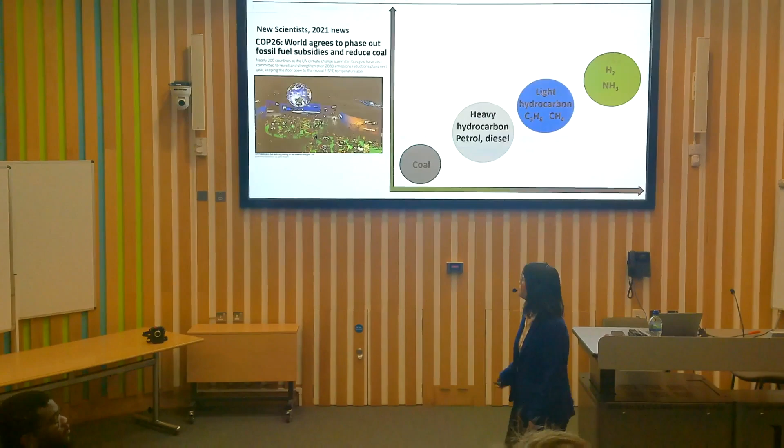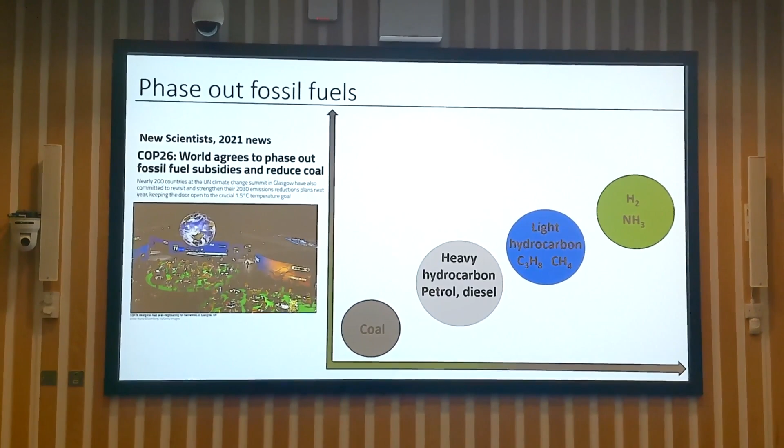I want to show this because this is my personal drawing showing how human society over the past probably 100 years, the past century, how the power source, the fuel, has evolved. So we started with coal, the dirty steam engine, and also the coal-fired power plant, powering transport and also electricity supply.

And it created a lot of problems. There's a huge amount of CO2 emission. I think the foggy London, back to, was it 1960 or 70, was part of that.

And it moved gradually to hydrocarbon, heavy hydrocarbon fuels that include petrol and diesel, which we use to power our cars and also some combustion engines. And then gradually moving to light hydrocarbons, methane, natural gas, and propane, C3H8. You can see we have more and more hydrogen coming and less carbon in the fuel.

So my hypothesis was that in the future, we can probably completely remove carbon from the fuel, and then we only have hydrogen left. Another chemical coming into play is ammonia, which I will mention later, why we want this chemical to come into play. So all this development is in the context of

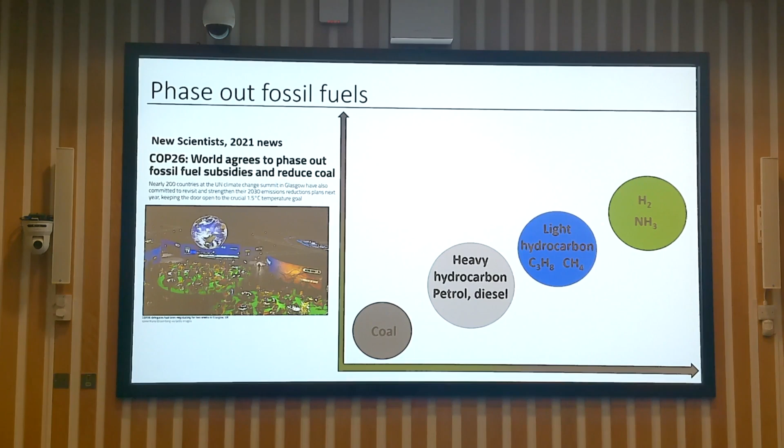So there's a lot of development of batteries in response to that, but I will show that there are some things that batteries cannot do. So hydrogen can come into play.

Back 5 years ago, the government set this 10-point plan where point 2 was to drive the growth of low-carbon hydrogen. There's a very ambitious aim to develop 5 gigawatts of low-carbon hydrogen production capacity by 2030. I think we are still far below that.

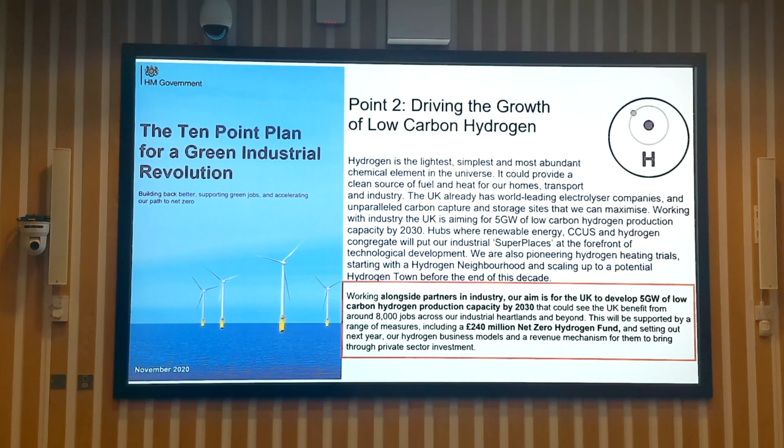There's a lot of funding now being put into companies and also research trying to develop that capacity. So in that context, the UK government Research Council decided to fund this UK hub for research challenges in hydrogen and alternative liquid fuel, and I got involved in this.

The aim was to develop hydrogen-based technologies, including hydrogen production, led by Professor John Irvine at St Andrews University, then hydrogen storage and distribution led by Professor Tim Mays, and use - I'm looking after that - and alternative liquid fuel, mainly ammonia, because we decided to focus on zero carbon fuel instead of fuels containing carbon, and ammonia became a promising candidate for that.

But of course, to develop hydrogen, it's not so simple, because there are a lot of things. There's public rejection, misconceptions, etc. There's probably not very good public acceptance.

So Chris Jones led the study on how to make higher social acceptance, and then Paul Dodds at UCL led the economic theme, trying to look at what kind of economic models we should develop in order to facilitate the adoption of hydrogen technologies, and of course the environmental impact of hydrogen technologies, and finally, but also very important, safety is very important.

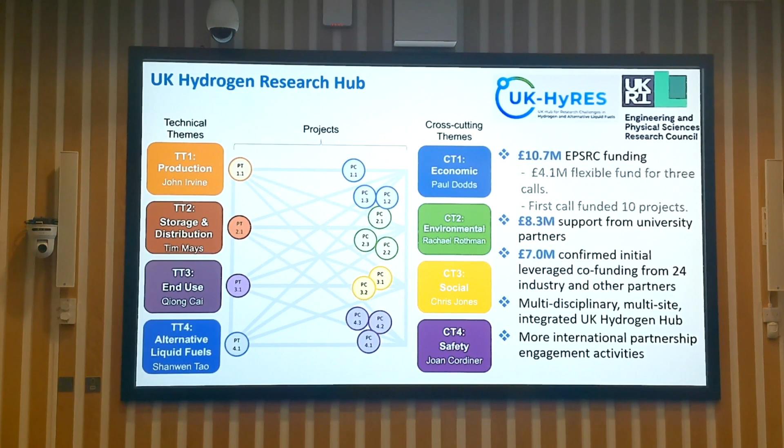So the first call, we funded 10 projects, which started early this year. There's also a lot of support from university partners to fund PhD students, because this is really not a lot. If we look at the US or Germany, they have probably 10 times or 20 times the funding we have here. It's supposed to be a multidisciplinary hub.

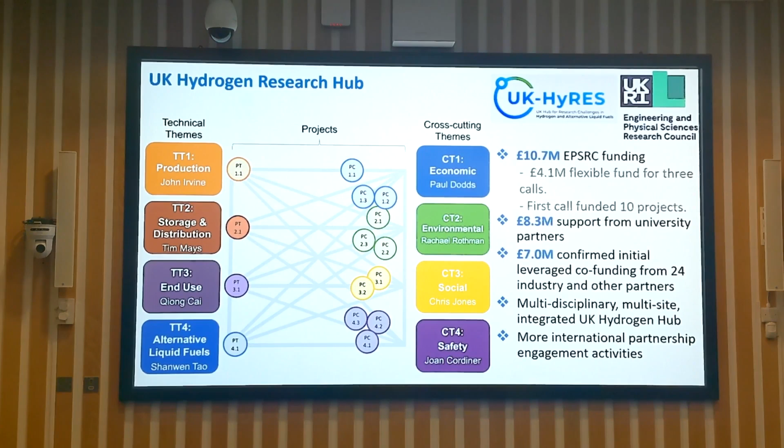You can see the nature of the work we're doing is really multidisciplinary. These are the funding university partners, and with the flexible call, we now have many more universities coming in, including University of Glasgow, Newcastle, Birmingham, University of Dundee, and other universities.

So what is hydrogen? Let's have a look. Hydrogen is the number 1 element in the periodic table.

This is hydrogen, and normally it exists as hydrogen molecules, having a covalent bond between the two atoms. There are some very unique properties of hydrogen we should look at. Similar to other matter, it can have solid, liquid, and gas phases. But the challenge with hydrogen is it only becomes liquid at a very, very low temperature, meaning most conditions exist as gas. And because it's so light, it can go everywhere.

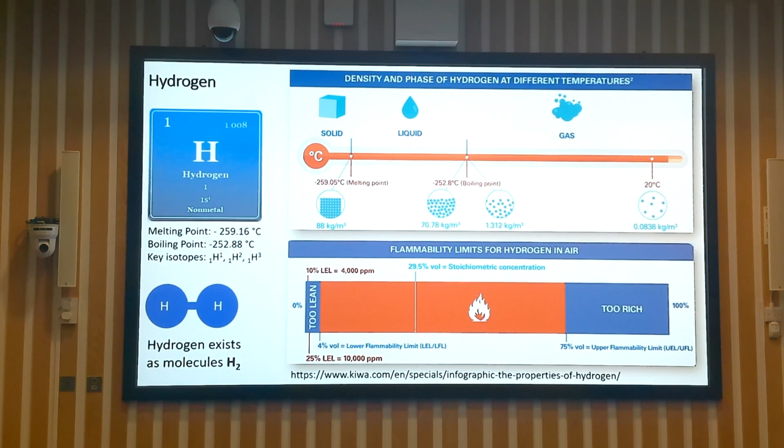Another challenge is it can be very flammable. Once the volume fraction of hydrogen in air reaches 4%, that's a very low percentage, it's easy to ignite. That's why hydrogen is very flammable - it can be ignited at such a low concentration, up to 75%. Below and above that range, too little or too much hydrogen, ignition is unlikely. Bear those in mind, we will come back to those points later.

Traditionally, we thought there's no hydrogen in nature - hydrogen didn't exist in nature. This has been modified by the discovery of so-called white hydrogen, the naturally occurring hydrogen, which was discovered, I think, 37 years ago. At the time its significance wasn't recognized, but now some companies are thinking about digging up that hydrogen, although it's very challenging. The UK hasn't discovered any hydrogen mines - it's mainly in the US, France, Europe, Australia.

But it's deep under the crust, where the rock becomes liquid, so it's not very easy to get that hydrogen out. Therefore, there's still a lot of development trying to produce hydrogen from different sources.

The first one is by coal - gasification of coal, producing hydrogen and CO2, and CO2 is a greenhouse gas. Gray hydrogen is by steam methane reforming of fossil fuels, again producing hydrogen and CO2. If we capture that CO2 and store it, then it's called blue hydrogen. Turquoise hydrogen uses a different method called pyrolysis - basically splitting natural gas, methane, into carbon and hydrogen, so you don't produce CO2 in that case.

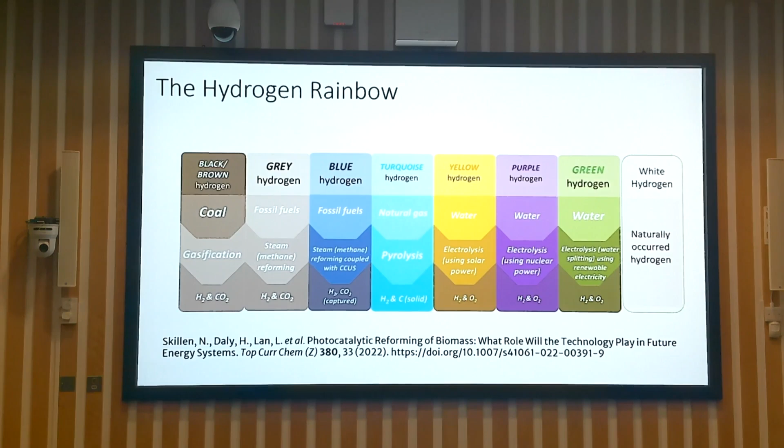I'm going to briefly introduce the main types of hydrogen production methods. The first type is the thermochemical method - I'm using a very simple illustration here. We can have coal, hydrocarbon, or biomass as input into the reactor, at very high temperature and pressure. We can either input high temperature steam to do the steam reforming reaction, or input air to do the oxidation reaction, producing hydrogen and CO.

That gas mixture then goes through another reaction called the water gas shift reaction to further convert CO into CO2, again requiring steam or air input at high temperature and high pressure. After that, depending on whether you remove the CO2 or not, you get blue hydrogen if you remove it, or gray hydrogen if you don't.

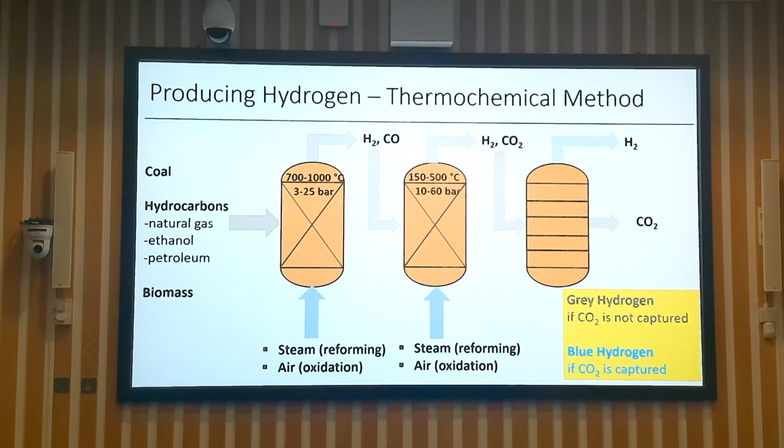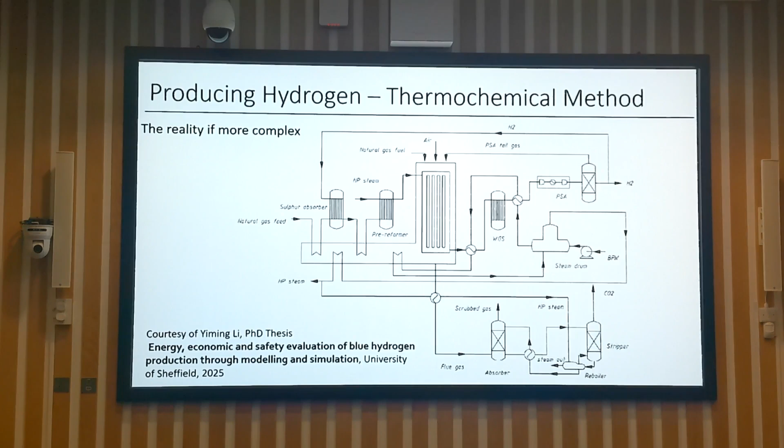So it looks very simple, but the reality is more complex. This is taken from a PhD thesis that I examined at the University of Sheffield, trying to develop a chemical process starting from natural gas input to produce hydrogen and CO2, and then do the CO2 removal. It requires a lot of units coming into play - this is chemical engineering. He did some calculations about energy consumption using different CO2 absorbers.

When we add carbon capture to make blue hydrogen, it actually adds a lot of energy consumption. Production of hydrogen without CO2 capture already consumes a lot of energy, but adding CO2 capture consumes a lot more. And the total annual cost, including the annual capital cost and the annual operation and maintenance cost, is also very high. So producing blue hydrogen by integrating carbon capture with hydrogen production is both energy intensive and very expensive.

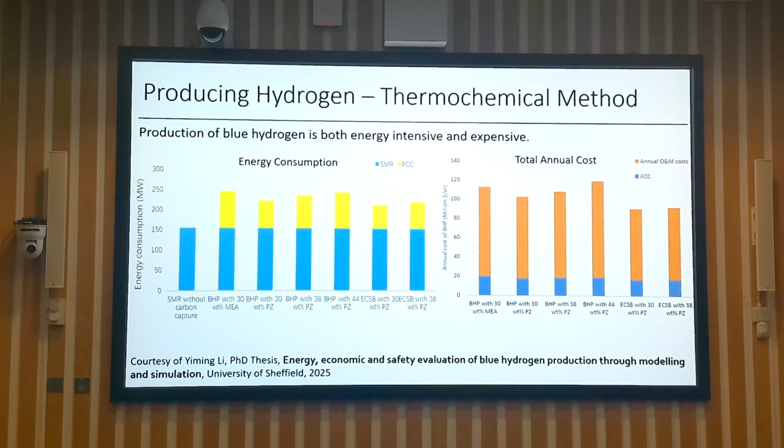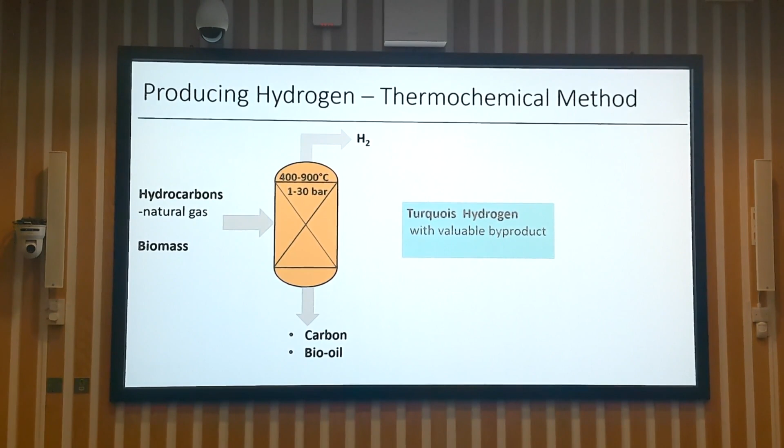Another method is also based on thermochemical principle, but using pyrolysis, as I mentioned. You can input typically natural gas or biomass. There's quite a lot of development within the UK and other countries trying to do this reaction, without any input of air or steam, just doing high temperature pyrolysis at high pressure in an inert condition. By doing this, you try to get hydrogen from the molecule, and then you get either carbon or bio-oil. This could be quite promising because then you don't produce CO2. This is called turquoise hydrogen, with a valuable byproduct. But looking at that temperature and pressure, and the inert condition required, it's not going to be easy. But yeah, it could be promising.

Another way is the photocatalysis method. This is very sustainable because you can just use photons from sunlight, and then you stimulate some holes, and do some conversion of holes into electrons. I'm not a physicist, but I think some of you are better than me in understanding this. This electron can then do the reaction to split water into hydrogen and oxygen. So you use a semiconductor to do that.

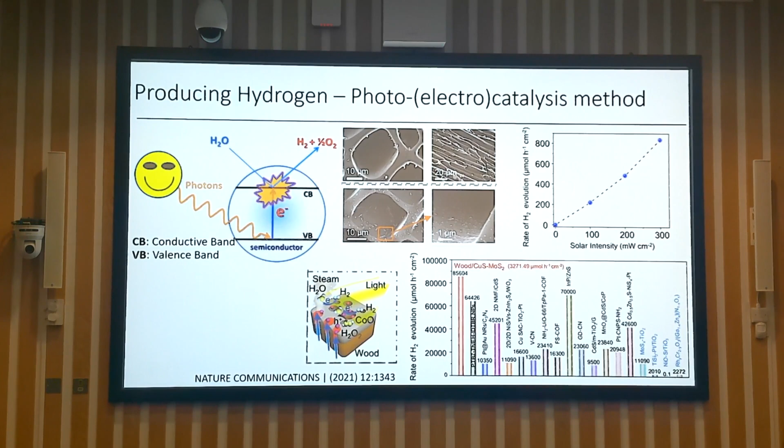I'm citing this paper published a few years ago, where they tried to load semiconductor catalysts onto a wood structure with a cellular structure, and they obtained quite high performance compared to many other reported results. But even so, the hydrogen production rate is in the order of micromoles per hour per centimeter squared - that's 10 to the minus 6 moles. So the hydrogen production rate is very, very low, probably not enough to meet our demand. There's still a lot of research trying to improve this, and if there's a significant breakthrough, this could become viable. But at the moment, the production rate is too low.

So the most promising method is by using an electrolyzer. This is quite similar to a battery - an electrochemical device with two electrodes, where two separate reactions happen. One reaction gives you hydrogen, one gives you oxygen, with electrolyte in the middle, and then you input electricity. The idea is if we get electricity from solar, wind, nuclear or geothermal, we could have sustainable hydrogen production. The efficiency of this device is normally 60 to 70%, so you can have a very decent hydrogen production rate.

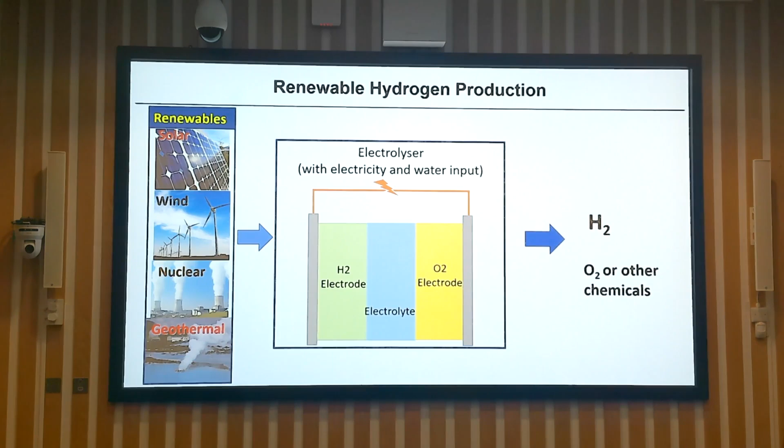Now there are different types of electrolyzers. The first type, which was invented many years ago - probably more than 150 years ago - is the alkaline electrolyzer. This uses alkaline media, potassium hydroxide, highly alkaline. Because of this alkaline environment, it enables us to use non-precious metals for catalyzing the reaction, such as nickel. In the middle, you have a porous material called Zirfon to separate the two electrodes, with separate reactions happening - you want transportation of hydroxide ion from one electrode to the other. It typically operates at 60 to 90 degrees C, and at this voltage range and current density, lifetime can already reach above 100,000 hours. It's the most mature electrolyzer.

There are a number of companies trying to commercialize this, and in recent years, a lot of Chinese companies are trying to move into this technology because the technical barrier is not so high, if you look at those materials. The downside is the current density is not high enough, compared to other technologies like this one.

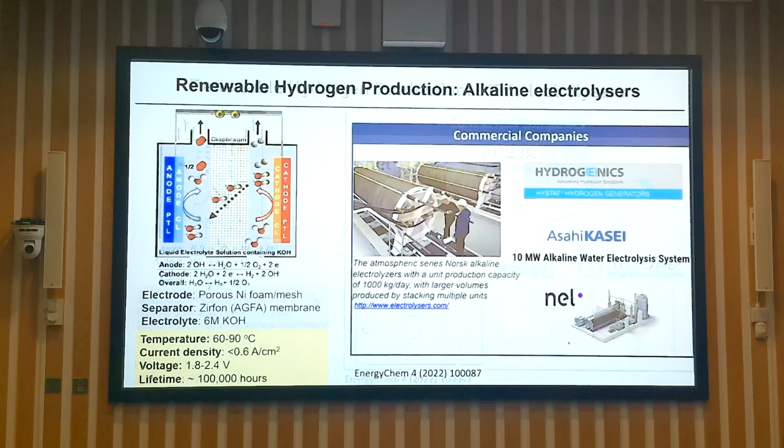Another type is called anion exchange membrane electrolyzer. Basically, it uses the idea of alkaline electrolyzer, creating an alkaline environment to enable us to use non-precious metal catalyst, which is cheaper. But instead of using a porous separator, it now uses a very thin membrane, probably 100 micrometers thick. The benefit of this is the internal resistance becomes much lower, so you can operate at a higher current density and low voltage.

So in terms of current density and voltage, it's comparable to the PEM electrolyzer, but lifetime is still a challenge. This is the current challenge, and there's an American company, a German company, and Canadian companies, but I don't think there's a UK company at the moment working on this technology.

Another one is called solid oxide electrolyzer. I want to say that both alkaline electrolyzer and PEM electrolyzer have now reached commercialization - you can buy them from the market. But anion exchange membrane, you can buy it from Enapter, a German company. I think they won a prize from Prince William, some kind of prize, two years ago.

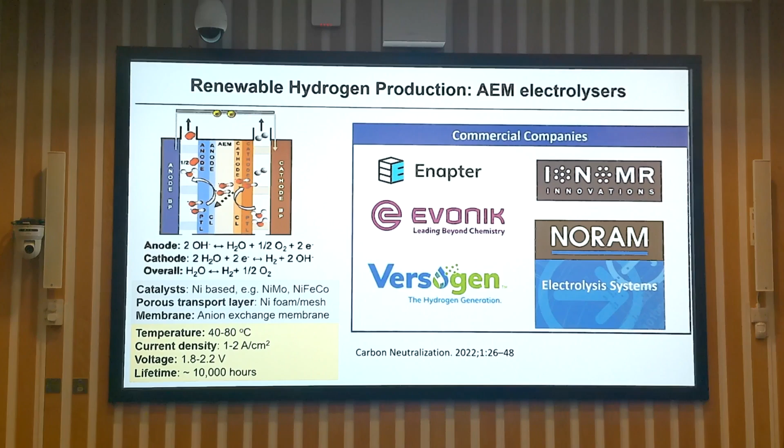This one is still under development. It's called solid oxide electrolyzer. By the name, you can imagine most of the materials here are ceramic, which allow the conduction of oxygen ions. The typical materials are nickel mixed with gadolinium-doped cerium oxide, and yttrium-stabilized zirconia. So all of them are ceramic materials.

And because of that - apologies, I think I got the overall direction wrong - you have to operate at high temperature because the conduction of oxygen ions is more active at high temperature. Typically, this has to be operated at 500 to 1000 degrees C, very, very high temperature.

Because of that, thermodynamically you can get very low voltage at this high current density. So the benefit of this is you get high efficiency, but then the challenge is to maintain that high temperature.

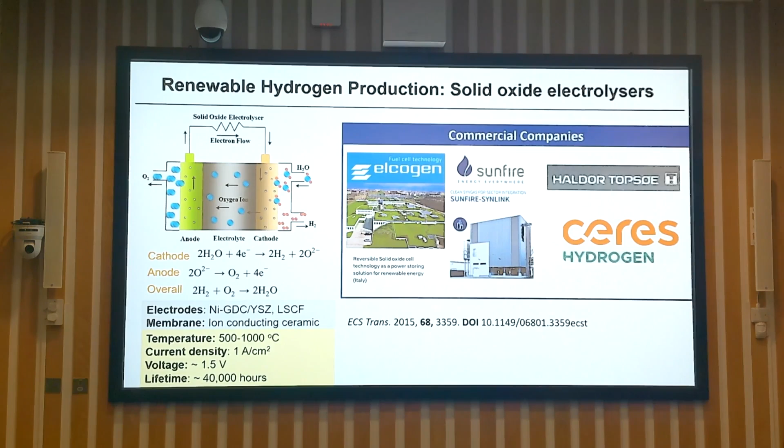There's a German company, a Denmark company, an Estonian company, and a UK company based in Horsham, and they now have a branch in Redhill. We are collaborating with them to develop this electrolyzer technology.

If we look at the cost of the PEM electrolyzer, you can see 45% of it is due to the materials used in making this electrolyzer - porous transport layer, bipolar plates, catalyst - but also you have some costs to do with power supply. You have to get very pure water, process the hydrogen, get it compressed, get cooling, etc.

At the moment, the cost of hydrogen production is nearly $5 per kilogram of hydrogen. The US Department of Energy set a target that if we want to reach widespread application for hydrogen, ideally we want the cost at $1 per kilogram.

And to do that, they did some analysis showing that if we get an 80% reduction in electrolyzer cost, we can bring that cost down to $3. But electricity cost is also a big part, so if we bring that electricity cost down, we can further reduce the cost.

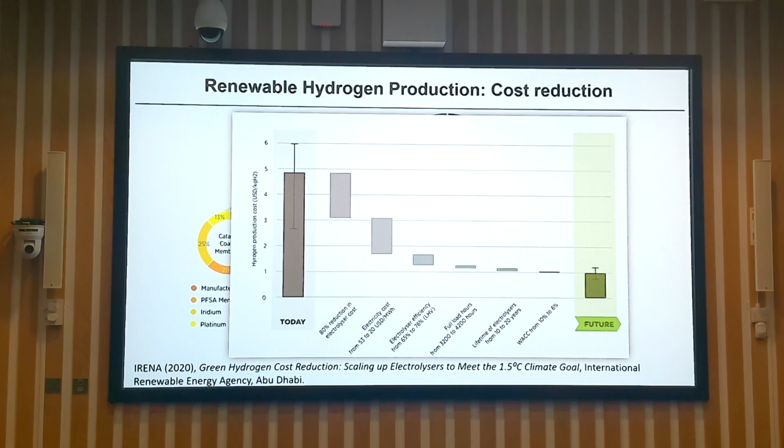That's the target, and hopefully we will make progress on that. Based on this, this paper nicely maps out how we can use hydrogen - we can use it to heat up buildings or for cooking by pumping some hydrogen into the gas grid.

This is still under debate, not all people agree with that. There's an EU regulation to set the limit amount of hydrogen that you can put in the gas grid. I think in Europe they are now trying to do that, but the UK still hasn't opened that possibility.

We can also use hydrogen in cars, powering passenger cars, buses, trains, and trucks. At the moment, because batteries have been developed so well, the common sense is that probably for passenger cars, batteries would be better than hydrogen. But for buses, heavy trucks, and trains, hydrogen probably works better, because batteries become very heavy to put on those vehicles, and hydrogen can probably last longer.

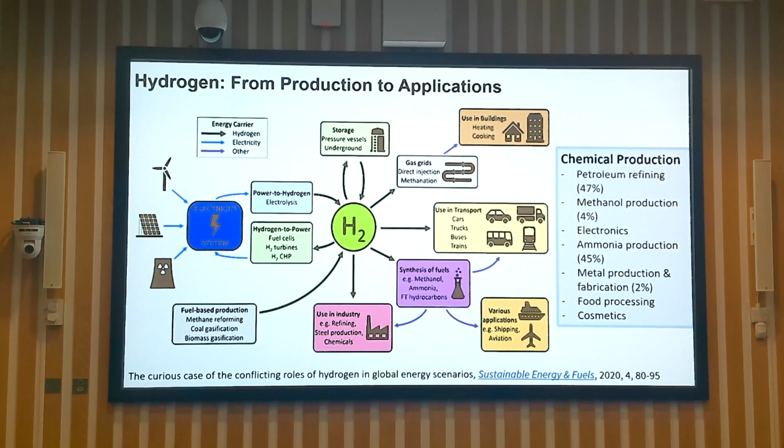So if we want to decarbonize those sectors, we also need to decarbonize the production of hydrogen. As I said, the most promising way is by electrolysis of water with electricity coming from renewable energies.

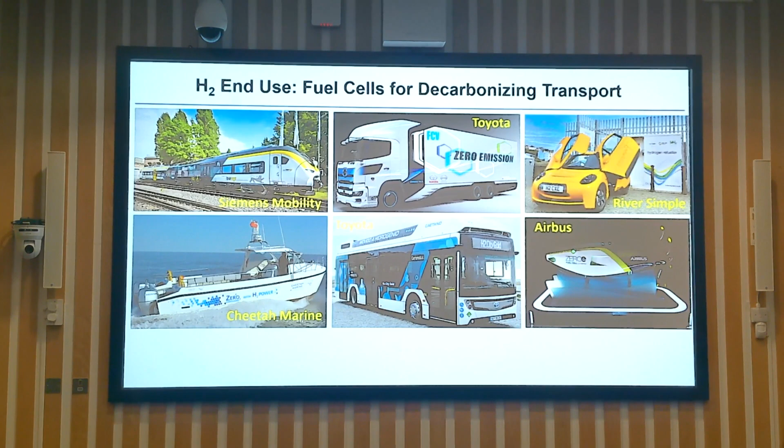Just to show some showcases of applications - this is when we use a fuel cell. We can use hydrogen to supply a fuel cell to generate electricity and use that to power a lot of things. Examples include trains, trucks - this is a UK company, RiverSimple - Airbus, Toyota bus, and marine applications. These are already being used and applied.

The UK actually has a very strong base in fuel cell technologies. Over the past, I think 3 decades, there has been a lot of research into fuel cells. Those are the companies working on fuel cells in the UK - very strong internationally.

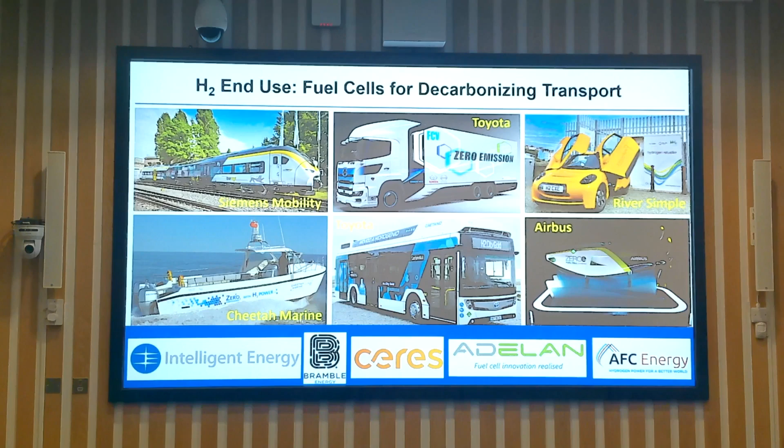Another application of fuel cells is for this so-called distributed energy generation. The idea is - this is a conventional electricity supply where the electricity is generated in a coal-fired power plant far away from residential areas. Then you transmit through transmission lines, and you lose energy throughout this process. If we start at 100% at the beginning, then we only get 35% delivered to the house.

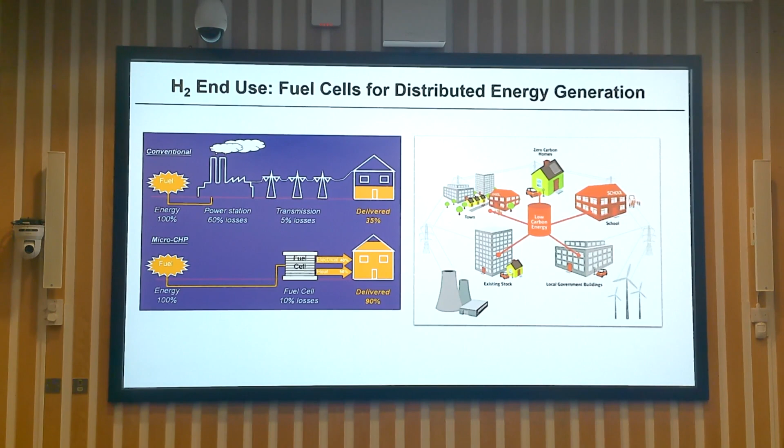But if we use a fuel cell in a house, or near a house, we can generate electricity and only have 10% loss - we deliver 90% of the energy into our house. There's a lot of development now in Japan and South Korea. They are building demonstrations in towns, small villages, and small towns using this idea of distributed energy generation.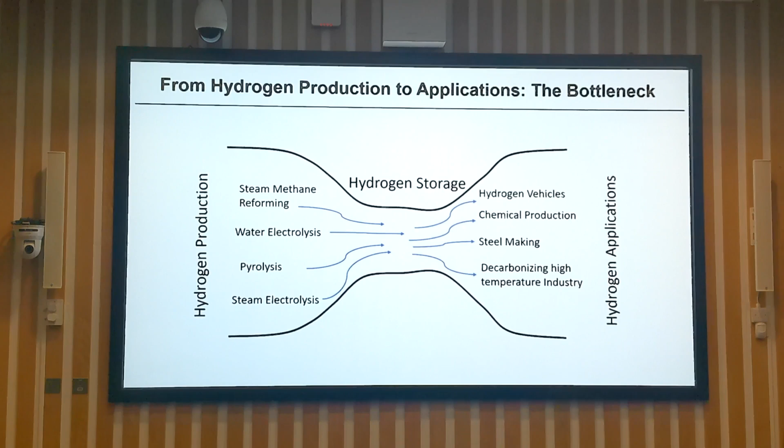So we've talked about the different types of hydrogen production technologies and different hydrogen application areas, but it's limited by hydrogen storage. Hydrogen storage is the bottleneck. I'm trying to illustrate this using this drawing.

If we look at 1 kilogram of hydrogen stored at different conditions, this is the volume we require to store 1 kilogram of hydrogen at normal temperature and pressure. If we increase the pressure to 700 bar, we decrease the volume to 24 liters, but it's still quite a lot. If we make the hydrogen into liquid, the volume becomes 14 liters. But liquefied hydrogen can only happen at minus 253 degrees C, so it requires a lot of energy and is very energy intensive.

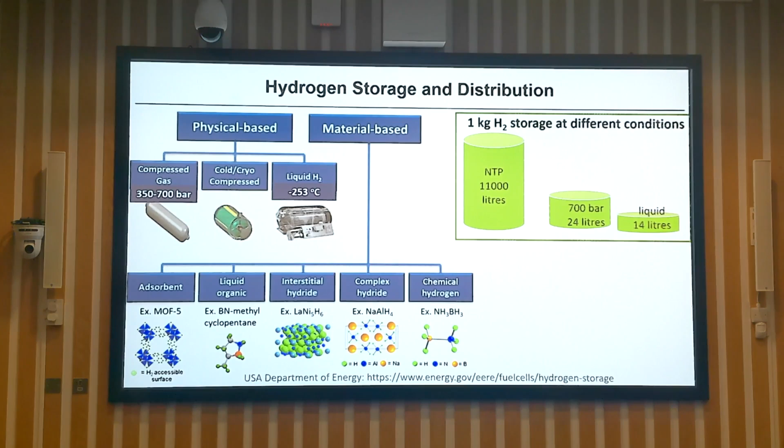Typically, I think now the most common way is compressed hydrogen at 350 to 700 bar in a tank. Another method is material-based, where you store the hydrogen in some kind of solid materials. There are a lot of different materials here, which I will give more detail on.

So we have this physical method - we store in compressed cylinders and liquefied hydrogen. For both of these options, they have been criticized in terms of safety. Transporting long distance is not ideal. And we've done some safety studies on hydrogen.

As we mentioned earlier, it's easy to go to the combustion reaction, so if you have leakage of hydrogen, then it becomes a tricky situation. That's why, within the hub, we now have some projects working on hydrogen sensors to detect hydrogen leakage.

Or you can use adsorptive hydrogen, meaning that you put some porous material in the cylinder, in the tank. So you probably store it at a much milder pressure, but the molecules can be stored in the porous material, so at a reduced pressure.

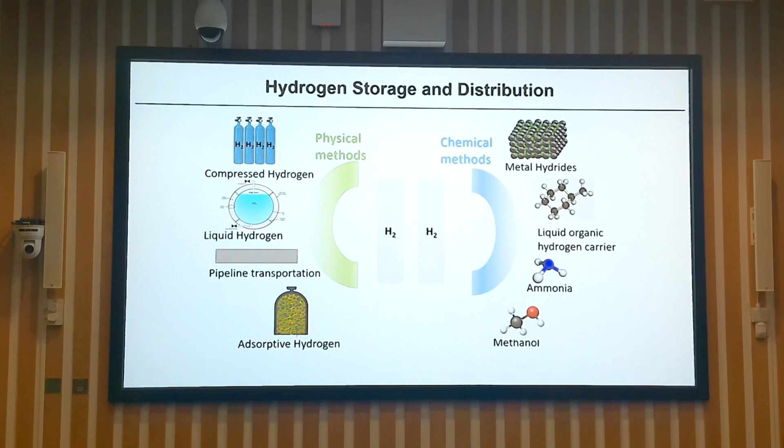The chemical method includes storing hydrogen in a metal hydride, such as magnesium hydride, but very heavy, and then liquid organic hydrogen carriers, ammonia, methanol. So for all of these, you have to have a second step to crack the hydrogen out, adding the cost.

So ammonia becomes liquid at either minus 33 degrees C under atmospheric pressure, or room temperature and a pressure of 7.5 bar. So you can easily liquefy it, and there's already a large infrastructure related to the fertilizer industry. So it's easy to store and transport, there's established production and transport infrastructure, and it's zero carbon, so you don't have CO2 emissions from that.

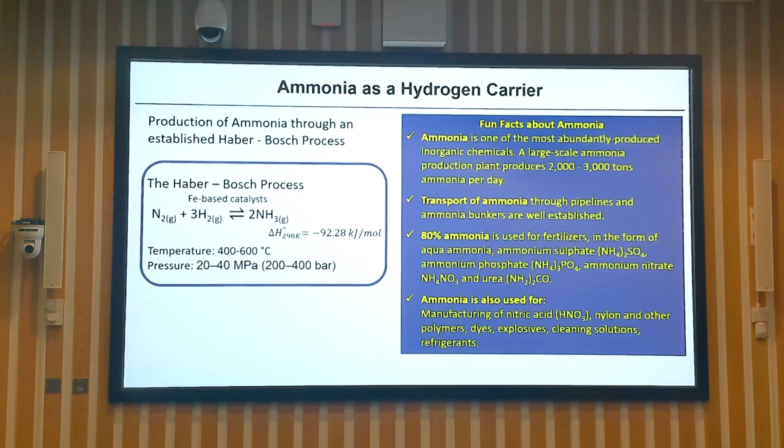So that's why there has been now quite a lot of research trying to develop alternative, low carbon or zero carbon methods for producing ammonia. So this is the conventional method, Haber-Bosch, using nitrogen from air and hydrogen from methane to produce ammonia.

So one idea is that instead of taking hydrogen from methane reforming, we could take hydrogen from water electrolysis, and then you can decarbonize this process. You can produce so-called low carbon ammonia, but still the Haber-Bosch process requires high temperature and high pressure.

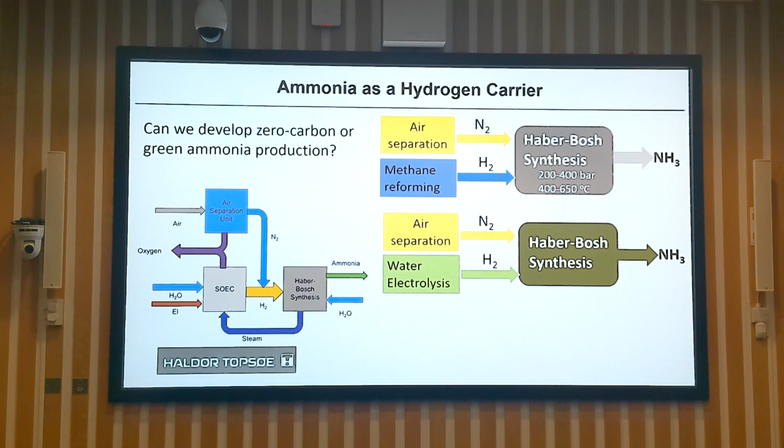And this Denmark company, Topsoe, they already demonstrated this idea - using a solid oxide electrolyzer, producing hydrogen, and inputting it into Haber-Bosch combined with nitrogen to produce ammonia.

Another, more probably radical idea is we just input water and nitrogen, and we make the reaction within an electrolyzer. So you just have electricity input, and then you produce ammonia. Currently this is probably the most promising route, but it's still in research - the production rate is still very low at the moment. So we need a breakthrough in that.

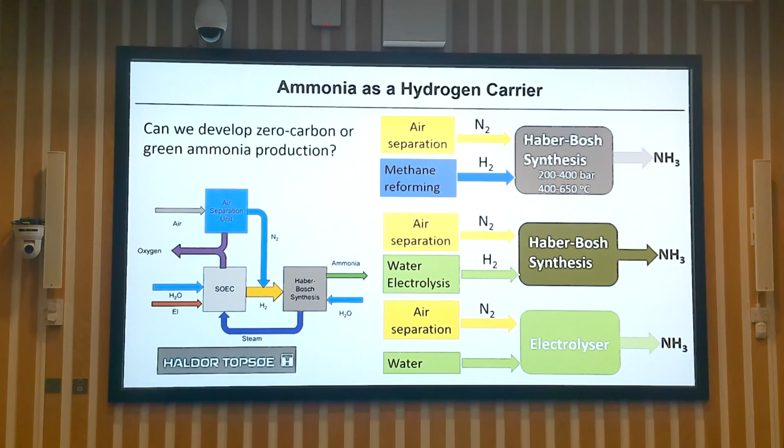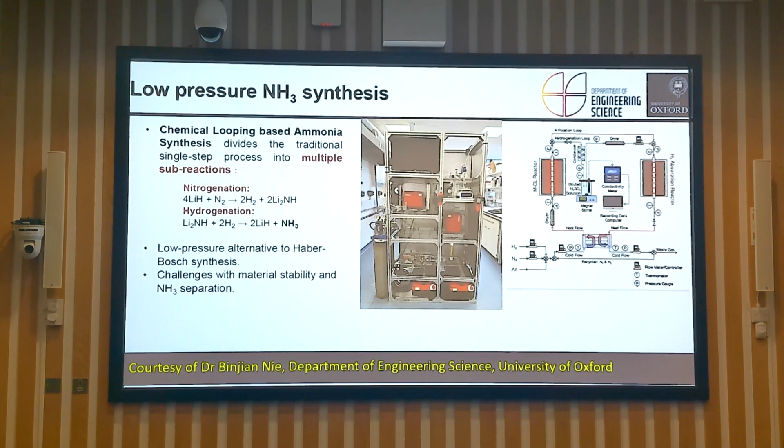So with that, I want to show some research being carried out with some collaborators. Oxford, Dr. Binjian Nie's group, kindly shared the slides with me. They work on an alternative method called chemical looping based on ammonia synthesis, using lithium hydride as a mediator to produce ammonia. By using this method, they can synthesize ammonia at a very low pressure - that's the advantage.

Hydrogen can be used in a lot of different areas, transportation and chemical production, but there's some other sectors like steel making and high temperature industry. These are very difficult to electrify because typically they require high temperature operation.

For steel making, there's a process called iron ore reduction to get iron. You have to put some reducing agents there, and traditionally they use coal to do the reduction reaction, which produces a lot of CO2. At the moment 11% of global CO2 emissions come from the steel industry, mainly because of that. The idea is that if we could replace some or most of the coal with hydrogen, we could get much less CO2 emission.

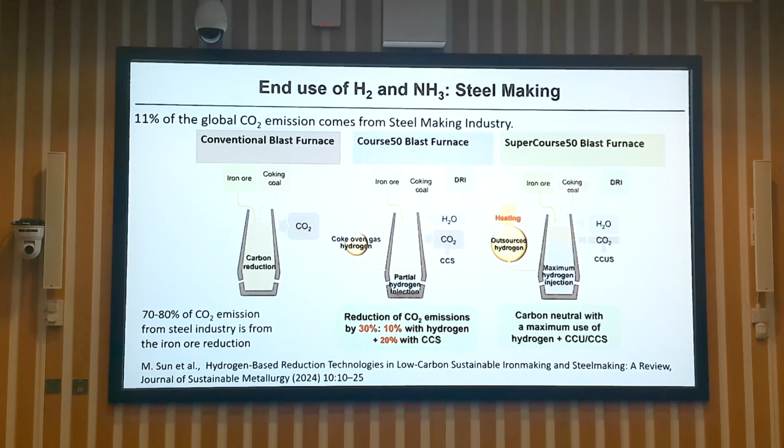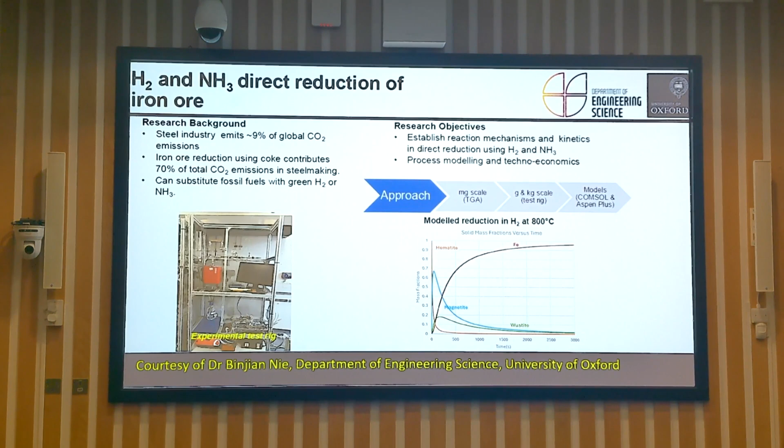A Chinese steel company called BaoSteel already demonstrated this, and this is also work by a South Korean company. Within the hub, Dr. Binjian Nie's group at Oxford is trying to use hydrogen and also ammonia to do direct reduction of iron ore. The ammonia direct reduction is still under research, so hopefully we will make that viable.

Other applications of using hydrogen and ammonia include Portland cement production, because this operates at very high temperature, and glass production, again very high temperature. The idea is to use the combustion of hydrogen and ammonia to produce the heat needed for that high temperature.

This has been successfully demonstrated at China's so-called Hydrogen Valley near Guangzhou, not very far from Hong Kong. I visited their lab last year. They published a paper, and when I visited them they also showed me the product, the ceramic product. They use pure ammonia combustion to provide the heat for ceramic production, and showed very low NOx emission, stable and complete combustion, and good quality ceramic produced.

This shows viable possibility of using ammonia to provide heat for high temperature industries where electricity would be quite difficult.

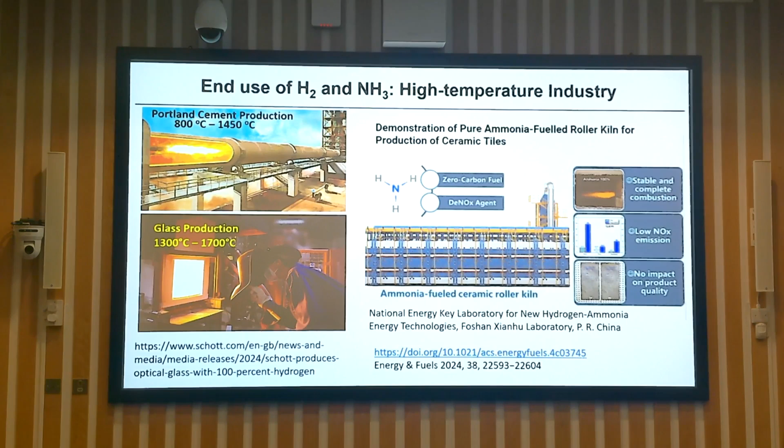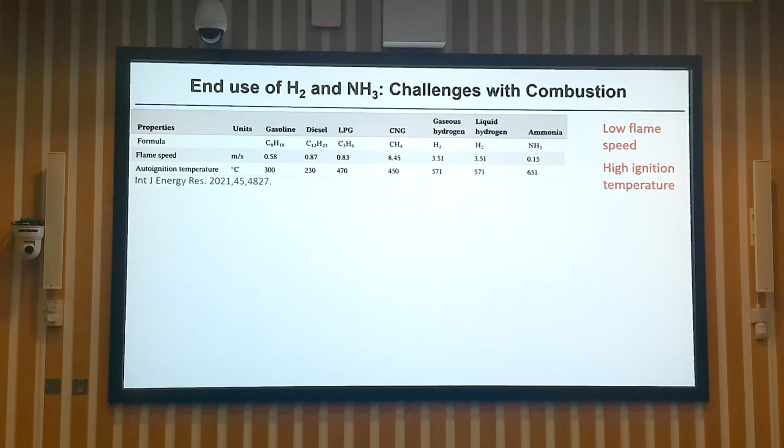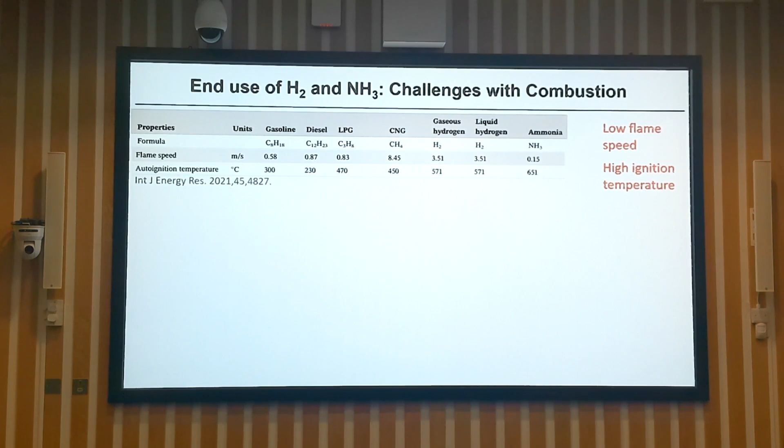But it doesn't come without challenges. There's a challenge with ammonia combustion - if we look at the flame speed, it's very low compared to other fuels, and also the ignition temperature is very high compared to other fuels. This low flame speed and high ignition temperature means combustion doesn't easily happen, which could be good news because it's relatively safe to transport around as long as we don't make it leak.

But then we need some energy to start with, and one method is to create a hydrogen-ammonia mixture, because hydrogen combustion is very fast.

In the UK, there are a few groups working on combustion of ammonia, including the lab at Cardiff University. I visited them earlier this year, and they say they actually prefer working with ammonia because if you have a leakage, you can smell it, while with hydrogen you cannot smell it. Also, the same volume of ammonia can last much longer than hydrogen.

If we use it in a combustor for a jet engine, for example, then the problem of NOx is actually not so bad because the engine is quite long, so by varying the ratio of hydrogen, air, and ammonia, you can kind of remove that. But for internal combustion engines, those working on vehicles, it's still a problem because the design of the engine doesn't allow complete combustion.

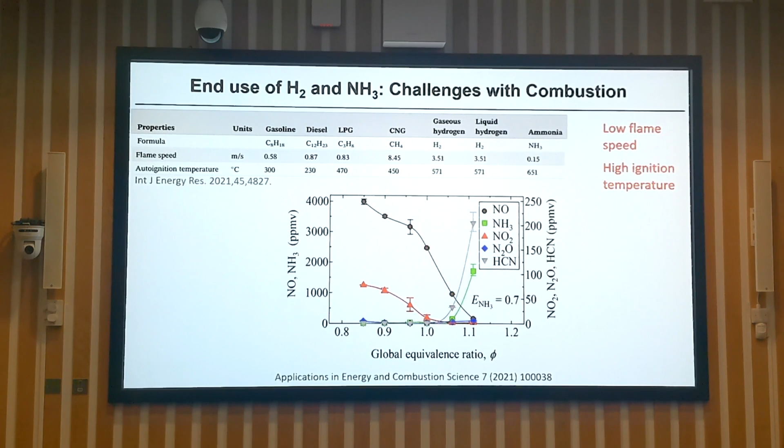So we have those problems, and these are the areas we are working on within the UK Hydrogen Research Hub. Birmingham, UCL, and Cardiff are working on novel burners, and we are working on developing low-cost catalysts to crack ammonia, creating that ammonia and hydrogen mixture to facilitate combustion, and developing low-cost catalysts for removing NOx.

I think that's probably what I want to talk through. I hope I have given you a flavor of the research being developed in the UK. I think the UK has covered probably most of the necessary research areas needed to develop hydrogen technologies, so internationally I think we are quite strong, but of course we need more funding.

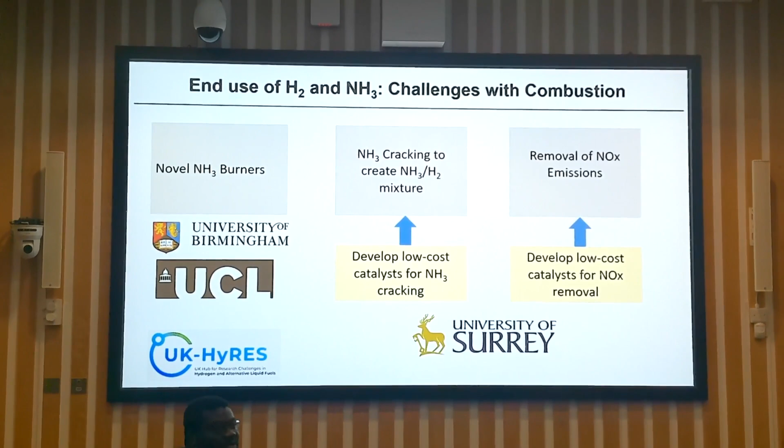Yes, please. You covered a number of areas and applications for hydrogen, and covered so much so quickly. I didn't quite understand the process for cracking ammonia at the moment, if you just want to produce hydrogen from it. What's the current process for cracking ammonia to produce hydrogen?

It's still thermochemical. You have a catalyst, you put it in the reactor, then you heat the reactor up, and at probably 300 or 500 degrees C, if ammonia needs to be directly decomposed into nitrogen and hydrogen, this can occur at 900 degrees C, but with a catalyst this temperature can be lowered to probably 500, 400, or 300 degrees C. So it's a kind of standard thermochemical method.

So currently, is it used in commercial quantities, that process? Is it actually used to produce hydrogen from ammonia, or do you just know how to do it, but no one's done it in volume yet?

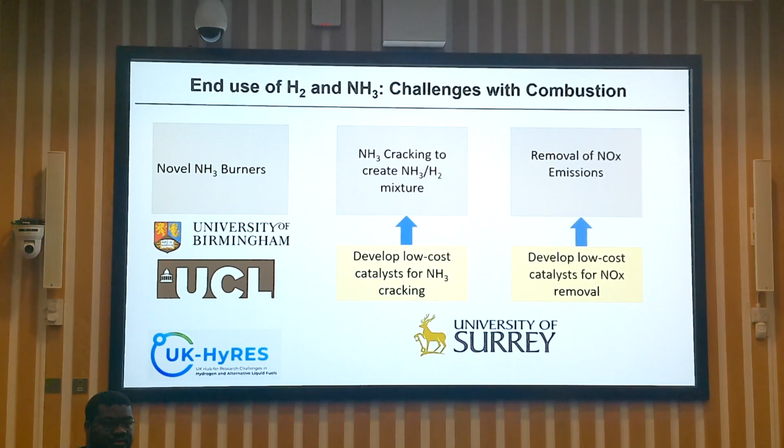So the current density, according to Faraday's law, will basically dictate the amount of hydrogen you can produce. Then at that same current density, the voltage - I should have shown a voltage-current curve for the electrolyzer. Normally when you increase current density, you get an increase in voltage. For different electrolyzers, if you operate at the same current density, say 1 ampere per centimeter square, they can be operated at different voltages. For an alkaline electrolyzer, for example, it typically operates at a higher voltage, meaning to produce the same amount of hydrogen you need a bigger amount of electricity as input. So it's beneficial to operate at a high current density but low voltage.

So in practice, are these electrolyzers connected in series, so they're like a big battery? So you apply, say, 50 volts across it because you've got 40 electrolyzers in series - is that how it's done?

Those are all based on thin film technology, so each layer in the electrolyzer is very thin, a few hundred micrometers. That's why the internal resistance is very low - it lowers the internal resistance. According to electrochemical thermodynamic principles, the current is being used to generate hydrogen. But if we have a higher resistance, we need a higher amount of electricity to overcome that resistance.